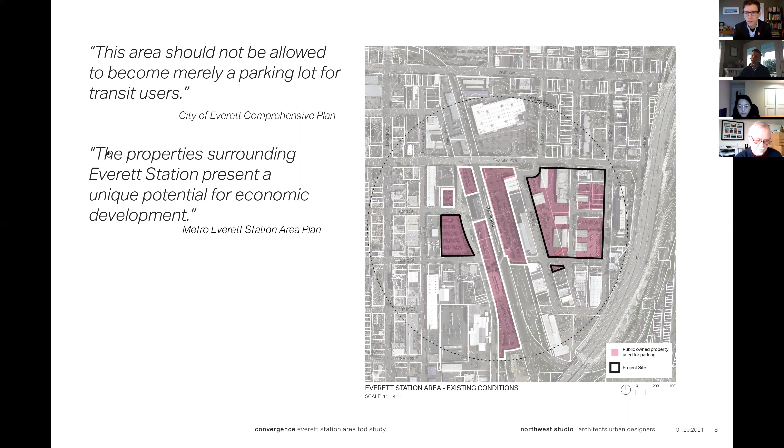Back in the fall, we were able to take a tour of the project site, just trying to get a clear understanding of the facts on the ground and what's physically there today and how that might be addressed. One of the questions that immediately came up as part of that work was where might Everett Station as a neighborhood fall on the spectrum of transit communities?

Clearly, it's next to the downtown core. It's a pulse point for transit and mobility choice as it links up to the bus and rail network. But it also has some very unique qualities, primarily the manufacturing and industrial character that's there today. So one of the questions is, does it even fall on the spectrum, or maybe we should be looking at breaking the mold or understanding the specific idiosyncrasies of this place?

Questions that fall out of that: how do we make the right impact in that context? How do we support some of those manufacturing and industrial businesses that are there today, and at the same time enable mixed use, mixed income development over the near term? And how might those two functions coexist and evolve together?

Also looking at how we might encourage the business sector to even grow in this neighborhood. Maybe there's an opportunity for a mid-range, Metro Everett scale job center coincident with the downtown. And then, over the long term, how does this area grow into a diverse, resilient, and equitable community? All key questions that this project is grappling with.

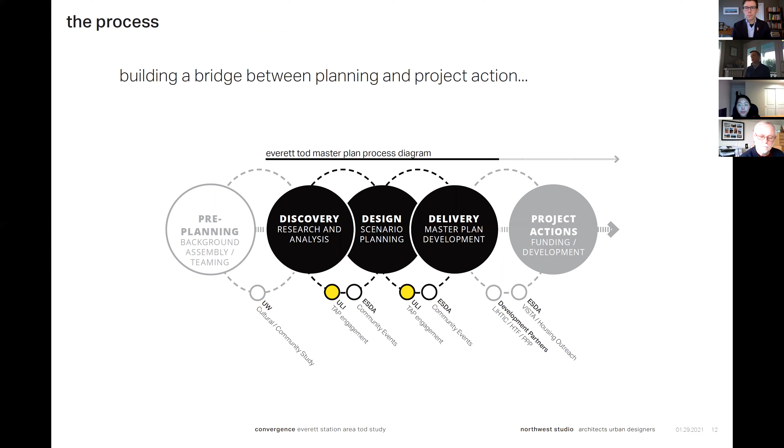We started in the fall with the discovery period. We're working now through design and scenario planning, working towards a master plan concept.

We've been asking a series of questions internally and through focus groups and outreach sessions to understand the range of potentials on any one of these sites. Today we're going to look at those ranges and gather feedback on what seems to crystallize, so we can conclude the project with an overall vision backed by information and feedback, with a clear path forward.

So Brock, I'll stop talking there and turn it back over to you for the next question. First, let's share the results from the first question.

Of course, this is just less than half of those who have responded. I'm now going to launch our second question, our first main question. One second here. If we could get more people to respond, that'd be great.

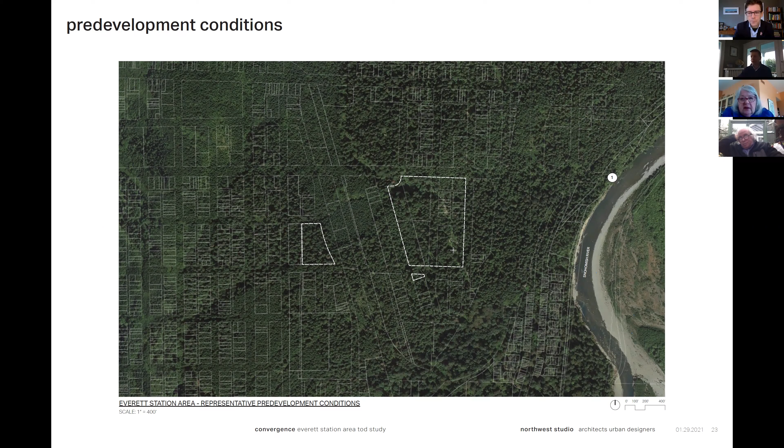Having a framework or notion of the potential responses that might come out of that understanding is important. What if we could return some of this area to pre-development conditions in terms of its environmental performance? We're not talking about erasing the development on these sites, but just the performance characteristics. It's something to think about as we move forward.

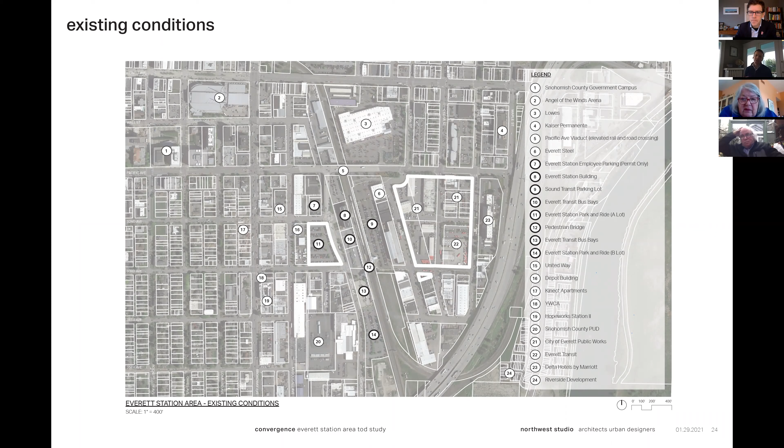Today the station area is populated by a variety of critical uses and functions. The station itself is at the heart of the district. The station building provides tens of thousands of square feet of community and public space for organizations and meeting areas. The park and ride lots and bus transfer stations create this mobility network and hub that feeds into other parts of the city of Everett and the region.

When we started this process, we began from the framework of the Metro Everett Plan, which establishes policy directives and zoning frameworks, not just related to land use. The area is now zoned urban mixed, which allows and encourages a variety of uses, together with the urban light industrial zone, which emphasizes industrial functions but also allows things like housing to occur.

Recognizing also that some of the frameworks under the existing Metro Everett Plan allow zoning heights somewhere between 7 and 11 stories, which can enable the typical 5-over-2 multifamily buildings you might see in an urban mixed-use neighborhood, all the way up to 11-story high-rises, which could potentially be an alternative model for development here.

The Everett Station area also includes, as I mentioned, quite a bit of public land. In fact, the majority of land area around the station is owned either by the city of Everett, Everett Transit, BNSF, or Sound Transit, which creates an incredible opportunity to leverage the value of that land for civic purpose.

There are also a series of potential street designations outlined in the development code, looking ahead to how a neighborhood might develop in the context of a transit-oriented district. One thing you'll notice is that the street typology and grid is fairly well defined as you move west toward downtown, but deteriorates as it moves into the district, recognizing that many of the streets there today are focused on freight and industrial manufacturing mobility.

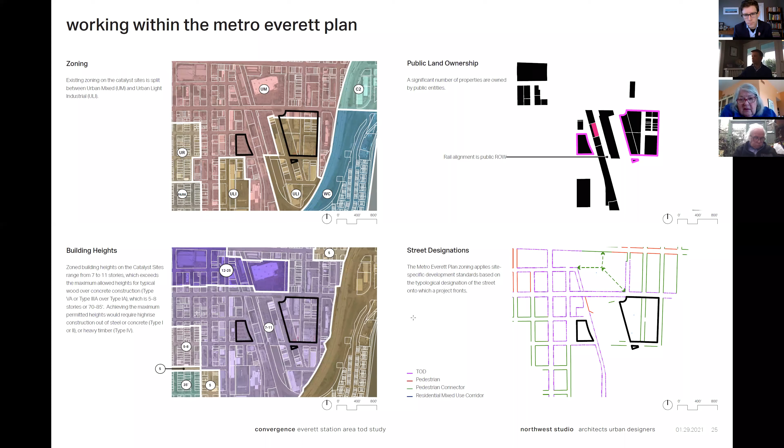So what are some of the programs we're thinking of as potential for these sites? Clearly, given the character and direction of the district, jobs and business spaces are a key piece of that. When we look at Housing Hope and HopeWorks as an organization, one possibility here is an anchor headquarters development for that organization, potentially upwards of 30,000 square feet, which could be a significant catalyst for development in the area.

We also look to key functions like childcare and other support programs that help businesses thrive. Folks in the industrial manufacturing workforce, or any workforce for that matter, myself as an architect, benefit from high quality childcare and education programs. To the extent that that can be part of a mixed use neighborhood is really important.

Public space, of course, community facilities, things like commute facilities and bike hubs and other access to key mobility functions are critical for the neighborhood, as well as mixed income housing. There are not many residents that live there today. There will be hundreds of millions of dollars invested literally in the future transit station, and to be able to provide more folks with access to that level of investment will be important to think about going forward.

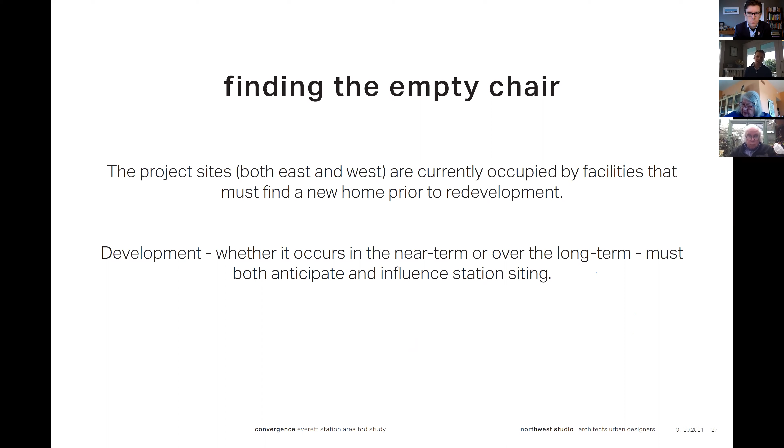As we think about how development happens on these two particular sites, while we're not locating the station as part of this project, understanding the potential for where that station could occur is important. I want to walk through a couple of the parameters that will have to be addressed as we talk about development examples and scenarios.

The first is the public works facility that is on the east side of the tracks. That function is currently looking at two potential options for relocation. One is at the Everett Point Industrial Center, or EPIC, which is just up on the Snohomish River. It's a very large industrial zone site that is probably better situated for Public Works' current function than the current site as it exists today. So they're looking at that as a potential move point.

As a secondary alternative, they're also looking to move down to sites on Smith Avenue, and the time frame for that move is somewhere probably within 10 years. I know they're working on a study right now coming to council probably at the end of the first quarter of this year to make a determination about which direction they're headed. But just as we think about development, we're probably 10 years out on that site, at least in terms of timing.

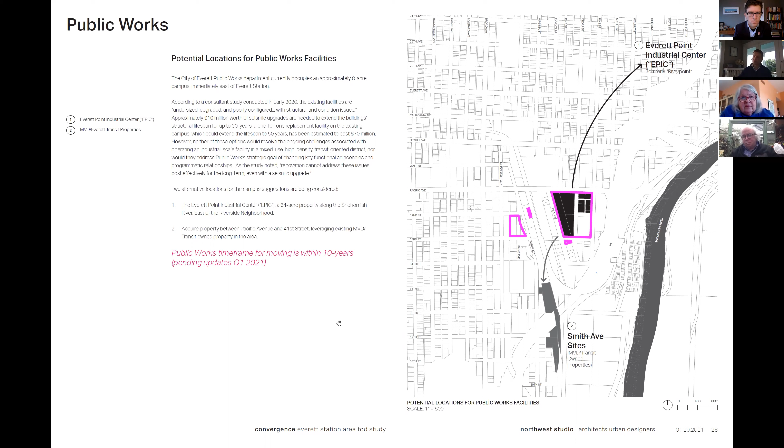Everett Transit, as you know, occupies the southeast corner of those eastern sites, on a property where it has its current bus facilities as well as bus storage and parking. As they look to potential moves, they've acquired land on Smith Avenue that might be a suitable location for them if they were to vacate that eastern site.

Their move, of course, is dependent on Everett Public Works, so they're just behind that in terms of timing - so 10 to 15 years potentially.

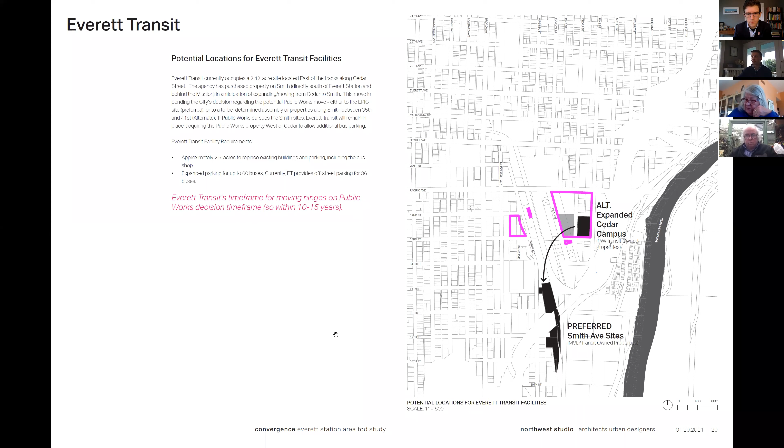And then, of course, park and ride parking. If we look at the west site, it's currently occupied by 242 stalls of Everett Transit's park and ride parking, 144 of which are committed to Sound Transit for the station. So in any redevelopment scenario, that parking either needs to be incorporated into a future project - that's the number 4 you're seeing on the screen - or it needs to find another home.

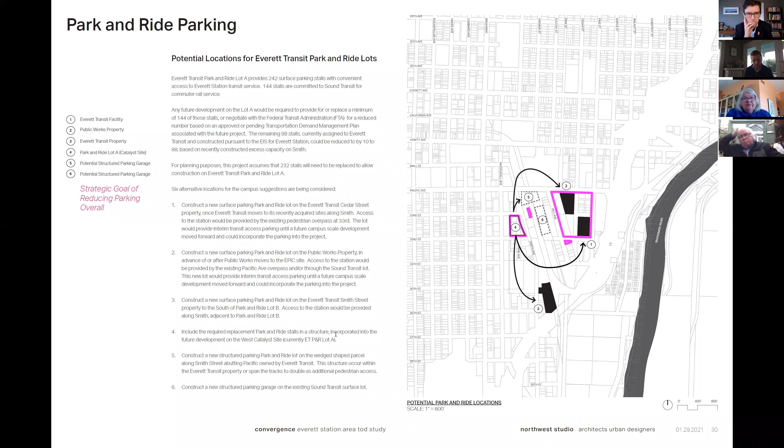There are a variety of locations for that, either on the eastern sites as an interim use as those sites, as Everett Public Works and Everett Transit kind of move about, or potentially on other sites close into the station. Either Sound Transit's property could be incorporated into that as redeveloped as part of the station development - that's the number 6 you see there - or it could be located down on Smith Avenue on the Everett Transit property, depending on where Everett Transit goes. So quite a number of moving parts that won't be solved by the time this plan is complete, but something this plan will need to anticipate as we move ahead.

And then, of course, anticipating the station - where might that go? Currently there are two potential scenarios. Again, the station is 15 years or so out, but the city of Everett has been very proactive in organizing a potential location for the station that really provides a link between the downtown core and the existing Everett Station itself, that would locate somewhere between 32nd and Wall, kind of straddling Pacific.

That would create that kind of hinge point - that's what you're seeing there with the number 1s. Sound Transit's representative alignment currently has the station in an elevated condition just south of the existing station building. That's what Sound Transit is moving ahead with in its initial planning phases.

But there are potential alternatives to that. Perhaps it could go on the east side of the tracks. There might be other locations that will become clear as we move further into that really 10-year planning process, as Sound Transit moves into its EIS.

So the time frame for the station is 15 years out. We're really talking about very expansive time frames as we look at this planning project. To Ed's point, it could be 50 years that it really takes to realize many of the changes we are contemplating as part of this plan.

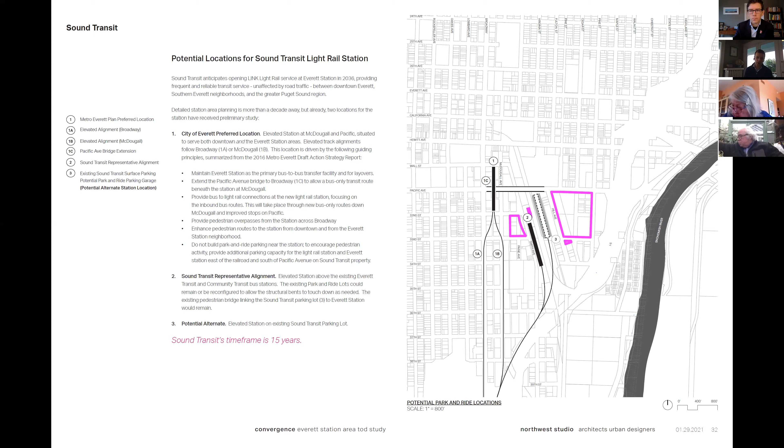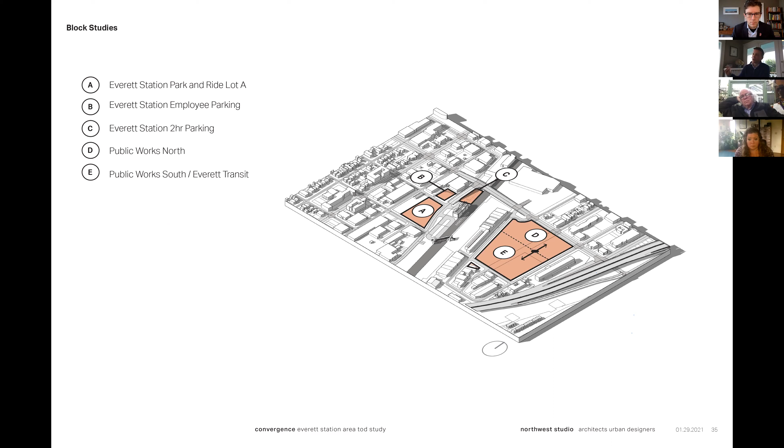A couple key ideas we're thinking about as we look to the potential for this neighborhood: how might we think about planning for the next generation? Clearly a future workforce here would need support services and programs, and one key piece to any work environment is affordable, high quality, reliable childcare for children. In an urban environment that's wonderful but also presents unique challenges in terms of play space and outdoor space for the students.

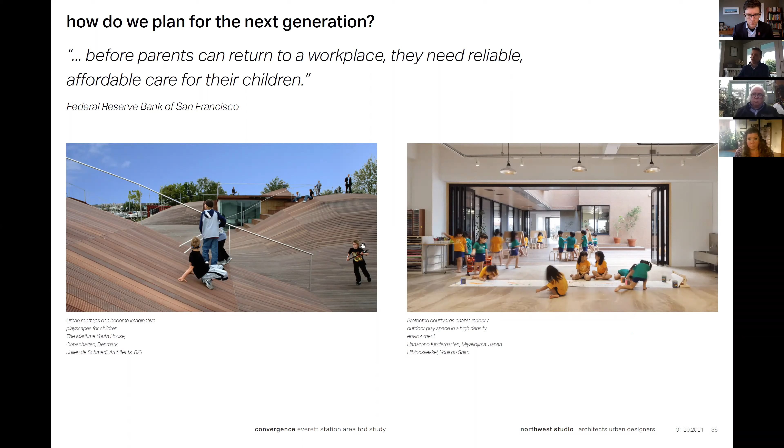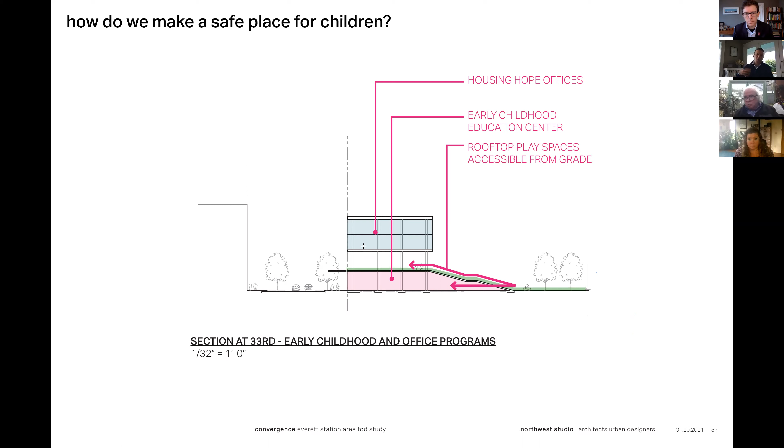As we look at the potential for that type of program to occur, particularly on the west side, given that Housing Hope has the Tomorrow's Hope early childhood education program that could become part of an initial development, we're looking at ways to allow those outdoor functions to occur throughout and within the building, potentially even on the rooftops.

Looking at how allowing childcare to occur in the neighborhood might play out on the Western Block, we looked at three varieties of how that might function. One might be a consolidated childcare building on the southern end of the block, co-located with HopeWorks and Housing Hope's headquarters building, creating an anchor on the southern edge of that block to help buffer between industrial functions south of 33rd and the more mixed use character of the neighborhood as we move north.

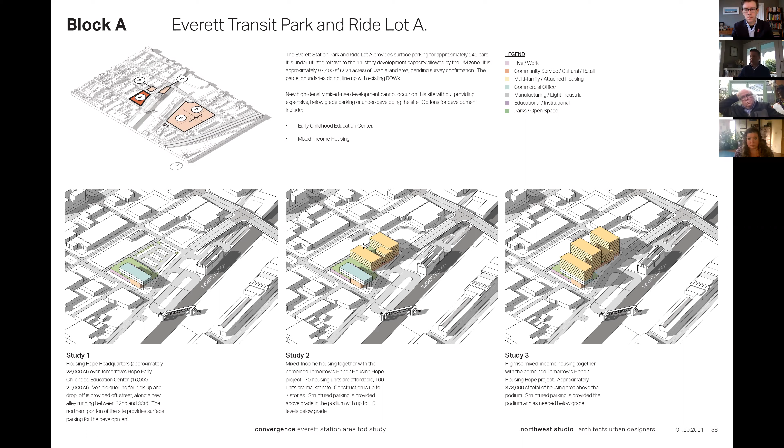We also looked at different levels of mixed use and mixed income housing on that western block, up to about 170 units of mixed income housing with a 5-story over 2-story development prototype, all the way up to potentially almost 400,000 square feet of housing, which is possible under the existing zoning code, together with other functions like early childhood education and office.

We also looked at other key considerations, like how do we leverage the value of the public realm? It's not just that we have an incredible amount of acreage in public ownership used for parking, but also quite a number of streets and rights of way that we might think about leveraging to catalyze development. There are examples of that sort of thing all over the country.

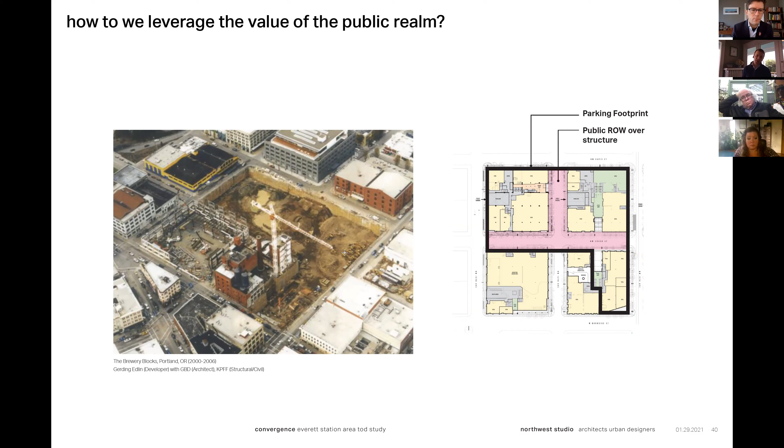We picked one nearby in Portland, the Pearl District, which started to redevelop from a former light industrial condition prior to the 1990s. One thing the city did was allow development underneath the streets themselves to help provide the parking that would be required in an underground condition, so that development above ground could build out to its fullest potential and really leverage the value of those rights of way.

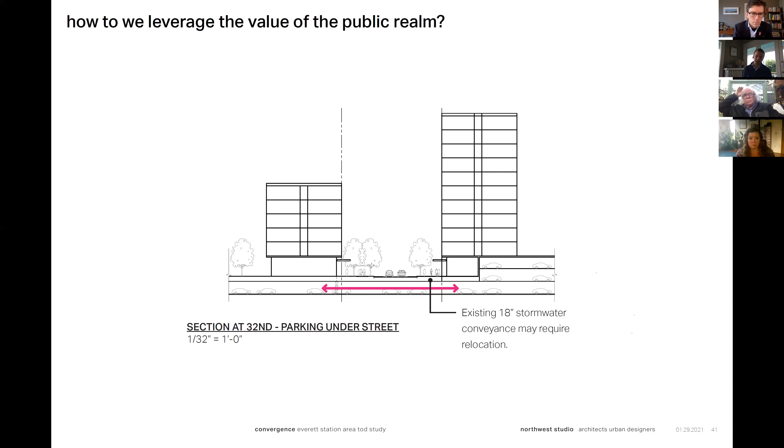One thing we might think about with some of the more constrained sites, like block B, just to the north of the park and ride lot we just looked at, is that to really leverage the potential of that site we may need strategies like enabling construction underneath the public right-of-way. Because as that block exists today, it really can't hold the mixed-use development capacity to which it's zoned.

So if we don't look at some alternative to unlock the potential of that block, we're really looking at primarily a small format, potentially community program development. But if we were able to build underneath that street to provide parking, then we could unlock some of the zone capacity there, which could be used on its own or paired with development to the south.

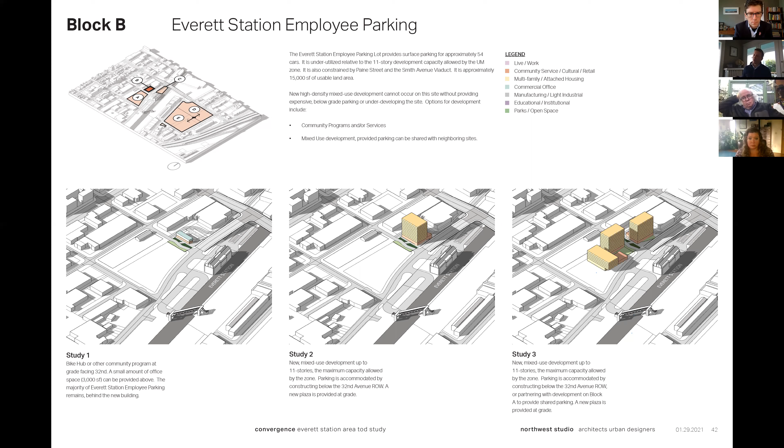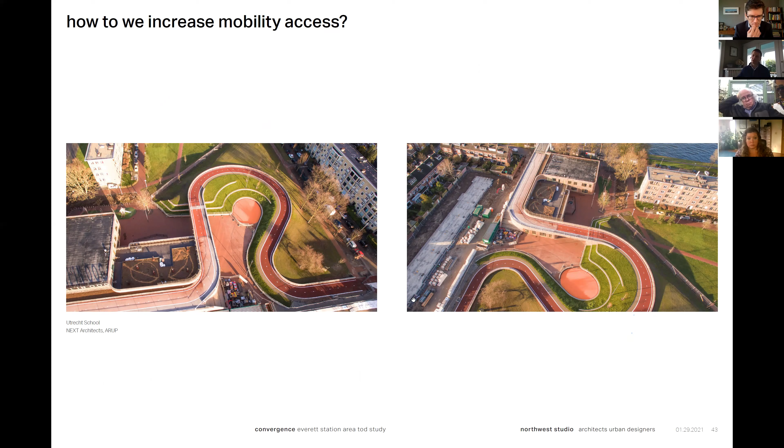We also looked at key ideas like how do we increase mobility access, and increase access to the station, really bridging the divide that the tracks create between the east and west blocks. It could be that we just need to leverage some of the infrastructure that's already there - the Pacific Avenue Bridge is a great example, providing a key point of connection for vehicle and freight traffic over the tracks.

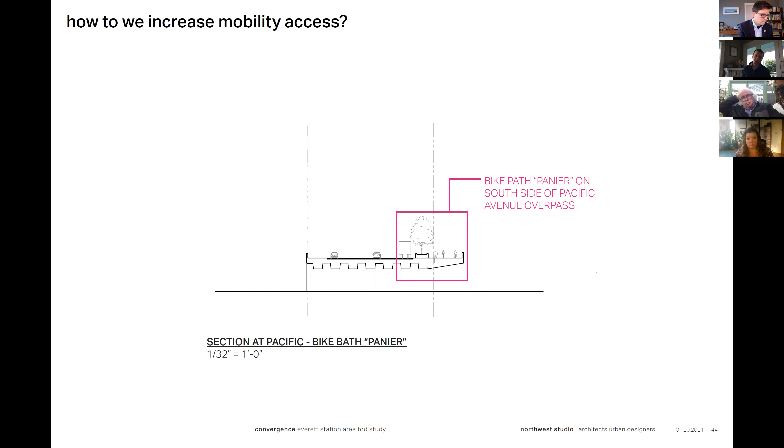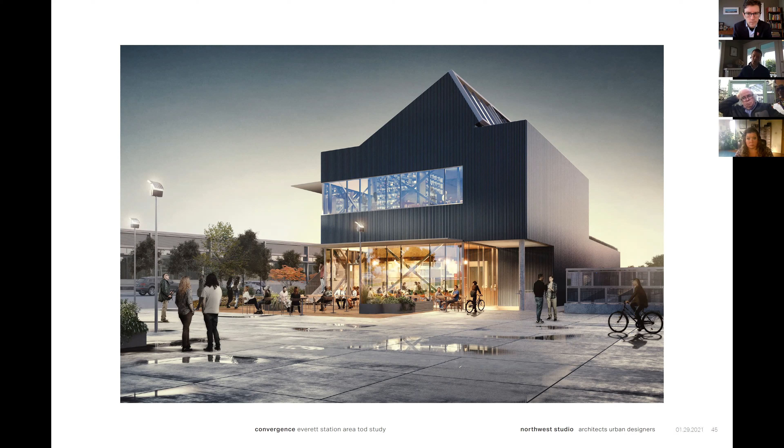But to the extent we can, maybe we can extend that right of way just a bit to allow for multimodal connections across that portion of the neighborhood - potentially building a bike saddlebag or path on the southern side of that block, or developing things in concert with the wedge-shaped property just north of Everett Station, in the nook just south of Pacific Avenue, that provide commuter facilities and bike facilities for folks moving in and out of the station.

As we looked at that block, there could be a variety of options to provide that secondary or tertiary level of connections from east side to west side. Everything from locating a bike hub building, to simply building a bike pannier on the side of the bridge, to even using that property as a parking garage site to help provide some of the needed replacement parking for those 242 stalls, and use that to leverage connections across the tracks, which, to Miranda's point, could tie into Sound Transit's own planning for its property and for the station.

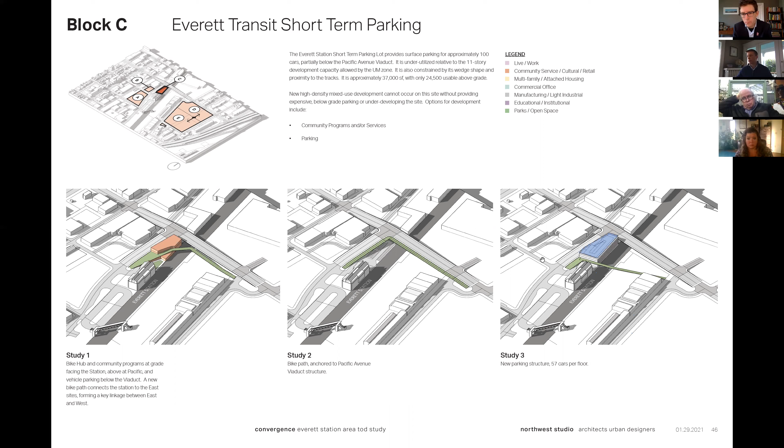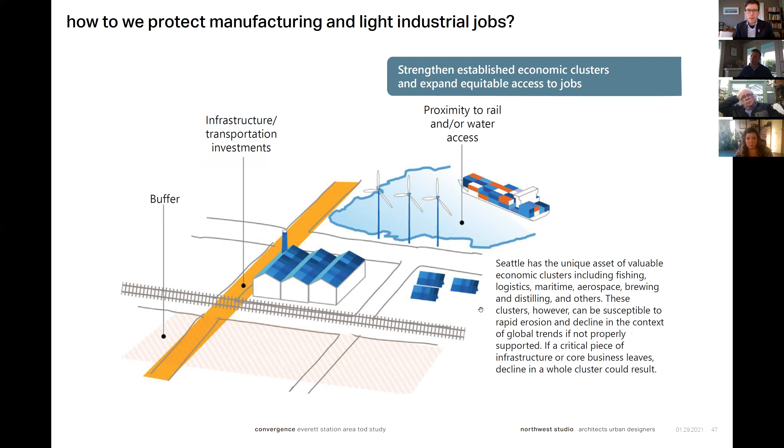We're also looking at how to protect manufacturing and industrial jobs, key strategies like buffers between dissimilar land uses, particularly residential, and a few other pieces to help support that condition. As we look to development in the neighborhood, there might be parts of blocks held out so that we can provide that separation between mixed use and industrial use, which really helps protect the viability of some of those businesses that have more noise and vibrations associated with them that new residents don't always play well with.

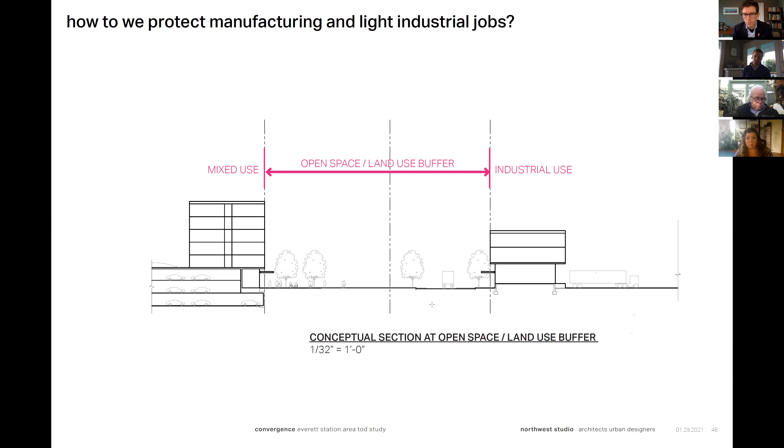And those buffers can really become key points of open space or parks and other civic infrastructure. That's really critical on the east side of the site, where we have a fairly large block, that division between blocks D and E, where we might think about leveraging the potential of that zone on the north, but really looking at the needs for industrial landowners to the south and providing that buffer between them.

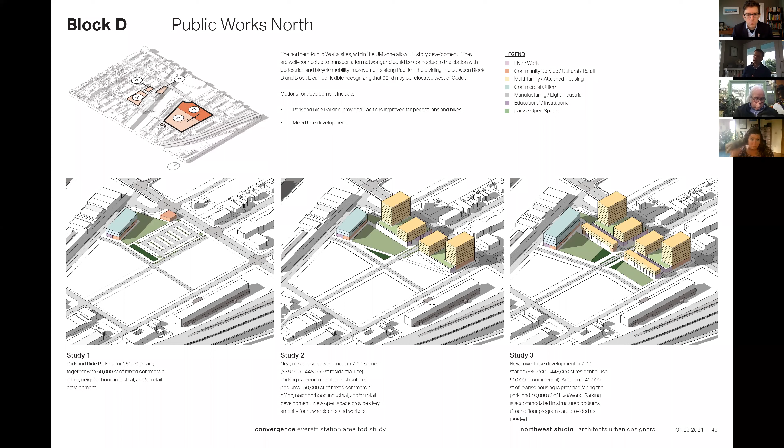Another concept we're working with is how do we enable business to continue and thrive in the district. One of the great things about light industrial manufacturing and neighborhood industry is the activity that can occur in some of those spaces, and that activity can be leveraged to really enliven the street and sidewalk space.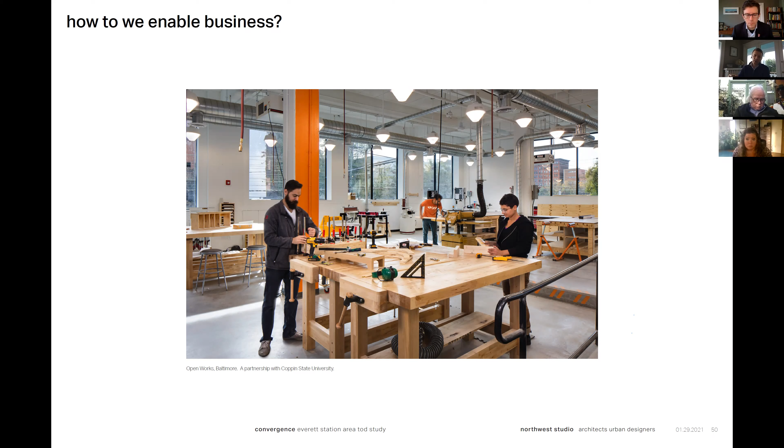Examples like Open Works in Baltimore have really taken advantage of that potential to transform a neighborhood. As we look at what might occur or strategies we might deploy here, currently the code prohibits manufacturing industrial use on the ground floor of redeveloped properties, and we may think about rethinking that idea, because it could really be a key piece of moving the neighborhood forward.

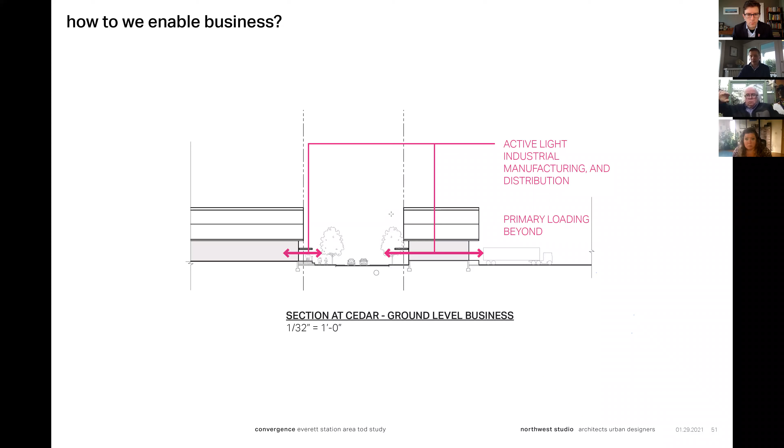As we look at how that potential might play out on the southern portion of that eastern block, clearly there are so many opportunities with a land area of that size and the mix of uses currently allowed under the zone. Everything from light industrial single-story development currently permitted, to a campus-level job center, the equivalent of the Spring District in Bellevue, or portions of South Lake Union in Seattle. There are really millions of square feet of development potential over there.

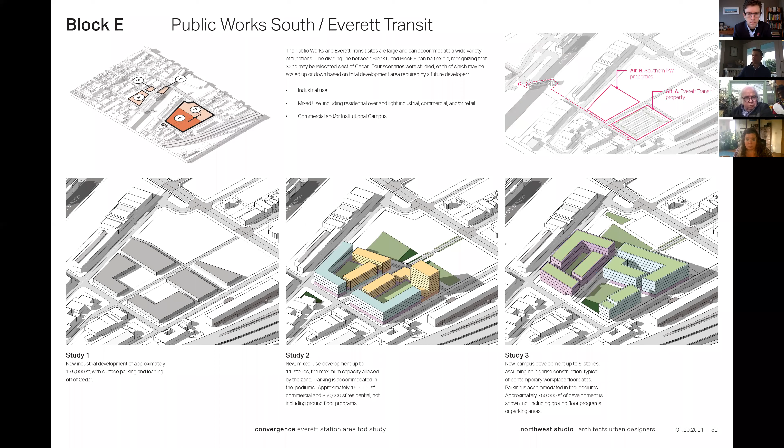So how might that roll up into an overall strategy for neighborhood development? It could be that from a land use perspective, there are a spectrum of land uses deployed across the district, focusing some of the more commercial and industrial uses further to the south, really bordering on 33rd, to create that important transition from commercial industrial use through to a more mixed use condition as we move northward into the district, and then provide those key connections to downtown Everett and beyond.

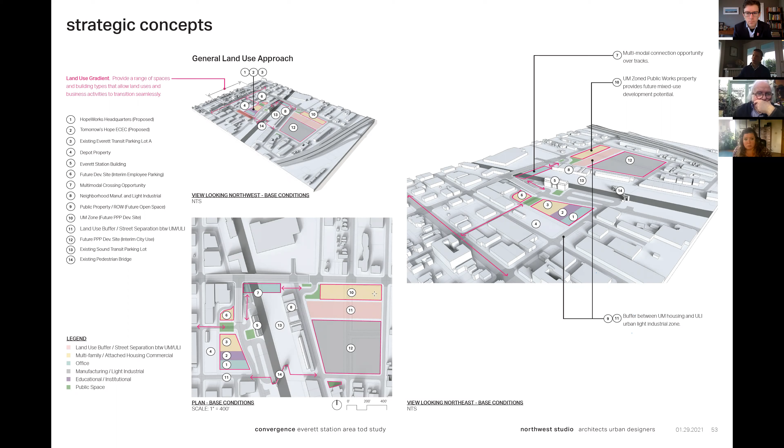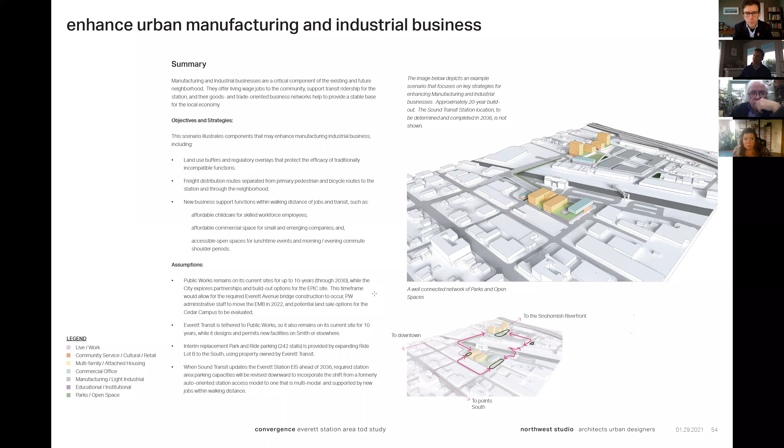Just as an illustration of the assembly of those different strategies into an approach, this is by no means the approach, but just three different ways to think about the site: first, enhancing the manufacturing industrial business by holding out the land on the southern portion of that public works lot for future planning and those uses, to thinking about neighborhood development as anchoring a job center in the district.

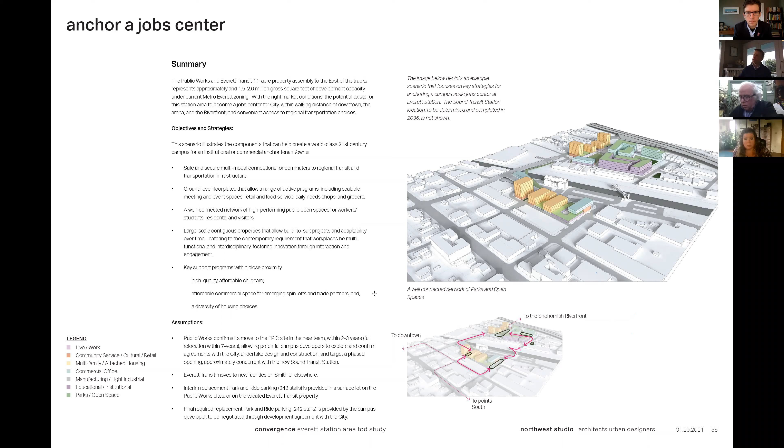How might that occur, and what might some of the land use and building form needs be to enable that? To really creating a fully mixed use and integrated district that allows housing throughout and provides some of those key early functions and support services, particularly on the west site, with a headquarters building for Housing Hope and HopeWorks, together with Tomorrow's Hope Early Childhood Education, and really much needed affordable housing and market rate housing on those blocks.

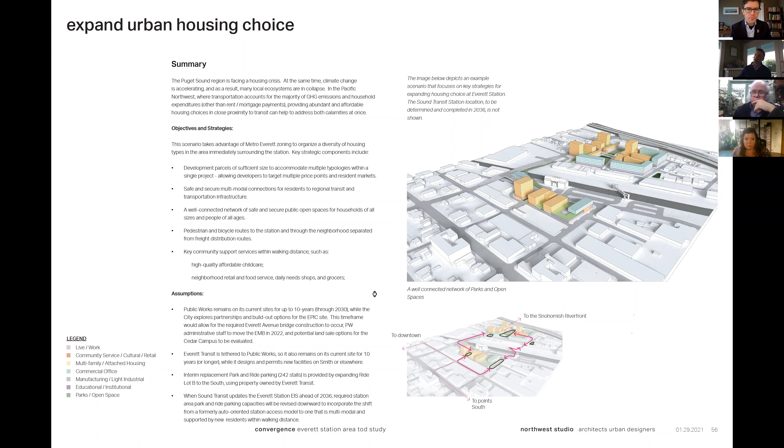So that was a lot, and it was quick, but I wanted to get the basic parameters out there and thinking out there. Later on, after we ask this question, we're going to move into some of the consultants' work on the particular issues related to infrastructure, mobility, and finance.

So Brock, we have just one question this time, after seeing a bit of the presentation in terms of what we're looking forward to: what are the most important issues to address now? There may be things not listed here that you think should be important, so feel free to add them into the chat. Unfortunately we don't have a feature within the polls where you can add something directly into the poll so it gets accumulated, so we do have to use the chat feature.

It worked this time. Thank you.

David asked, on the assumption that what you're showing us now is a preview of what's going to be in the report, should we look more at these slides? Yes, that's right. What we're doing here is...

providing a variety of different approaches that we'll need to refine in the report. We don't like to use 'preferred alternative' because it seems like you just pick from a menu, and that's not really what planning is. Planning is about finding a set of strategies that works for everybody, and those strategies might be divergent and overlap. But yes, you can take a look at all of these pieces. We'll post the presentation, and the final report will include a preferred direction—a synthesis of all these strategies, not any one of them in particular.

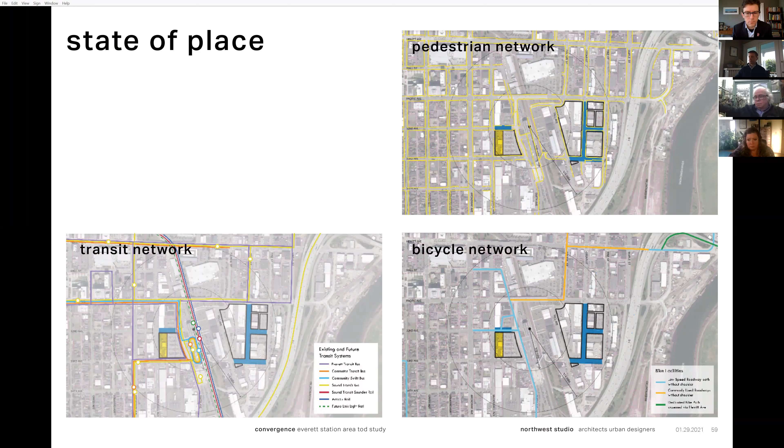Next slide, David. Next slide. There you go. So at the beginning of this process, before that one. Oh, sorry, my refresh rate is quicker than yours.

There we go. So at the beginning of this process, we went on a walking tour of the site, and some of our key initial impressions center on walking conditions, connectivity, transit connections, and parking. I think these are going to resonate with you if you know this area. The most prominent finding, in my opinion, was how unwelcoming some of the streets and connections can be.

Whether you're walking on some of the higher speed and volume thoroughfares like Broadway and Pacific, or walking along some of the district's industrial streets, you just get the sense that this space is for vehicles mostly, and not for people.

The rail corridor barrier, as David mentioned before, is a real limitation of the site. It creates 2 true halves, and it makes walking and biking fairly inconvenient between the 2 parts of the site.

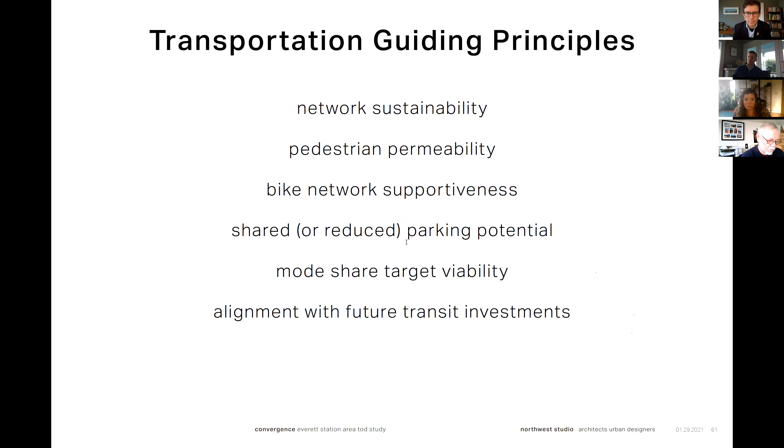Now moving into the strategic direction. Our strategic direction centers around 4 main questions. The questions we're trying to answer are related to how development can support a pedestrian-first district that is also transit oriented and reduces the need for parking.

How might development opportunities best connect people to both the current multimodal transit center and downtown Everett?

How transportation demand management strategies and effective parking management strategies can actually help catalyze development. And then finally, how we actually balance development of a pedestrian first and transit oriented community with ongoing industrial uses.

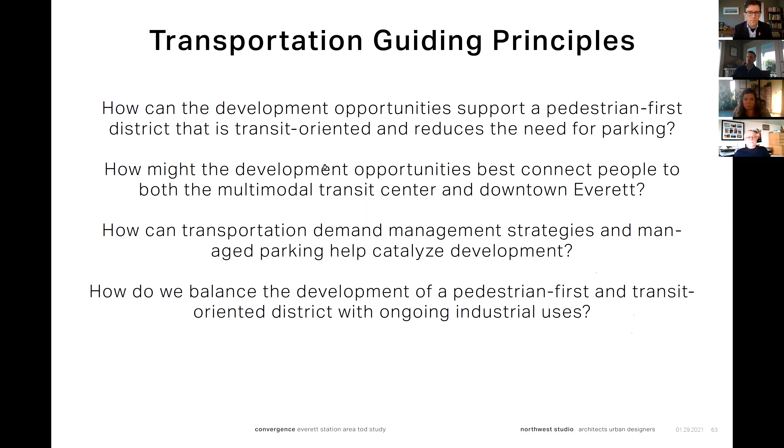We've identified 4 strategic directions with some potential actions. A lot of work needs to go into this, but these are just some initial opportunities we've identified. First is to manage demand for vehicle trips, off-street parking, and curb access.

As I mentioned, there's that 45% non-single occupant vehicle mode split target that the city is trying to meet by 2035. One of our most prominent findings is that parking is oversupplied, it is undermanaged, and it's really almost guaranteeing that people will continue to drive to and from the project area.

Parking and transportation demand management policy and programming is one of the most effective tools we have here. We're hoping that the city and the site stakeholders can align on development of these demand management strategies, including a parking management strategy that optimizes existing off-street supply and the curb network.

We believe that the current parking supply, as well as the potential future land use development, can actually support a district shared parking model, which aims to address peak parking on an hourly basis. You look at parking demand district wide rather than looking at parking as a whole for each land use. So there's a lot of potential there.

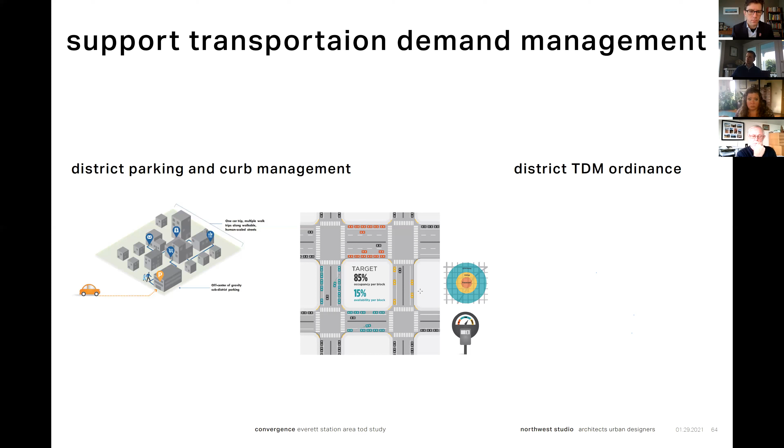The second direction is related to street investments. First and foremost, there are going to be various demands on district streets related to mobility.

loading, parking, but also more of an emphasis on public space, potential new park spaces within the public right of way. This is really going to require a thoughtful look at how you prioritize space throughout the district and along every single street. This is going to be really critical as there is interest to make the limited network you have do much more for more people that are going to be there in the future.

There's a strong interest to maintain industrial land uses, which is going to require accommodations for freight and delivery within a more walkable transit-oriented district.

We need to ensure that streets are both human scale but also facilitate the movement of transit and freight. We also think there needs to be a coordinated effort to align new enhanced pedestrian crossings with pedestrian and bicycle desire lines. One benefit of a site with limited street connections but large parcels is that we can create cut-through opportunities, so a coordinated approach is really in order.

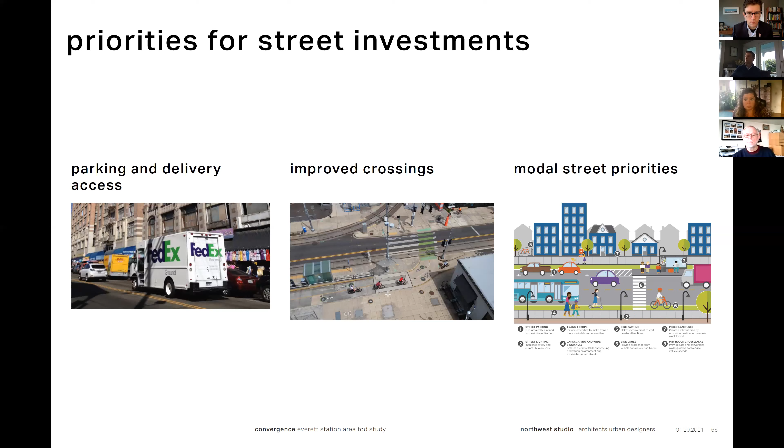The third direction is related to active mobility. I saw a lot of comments in the chat box about the real need for better pedestrian and bicycle facilities. The first opportunity is what we're calling creating the loop. The east-west division in the site creates a real problem for connections across the district, so we think a branded loop facility for people walking, biking, rolling, scooting, or what have you is really in order. Some of those concepts were on slides David showed earlier.

We also think potentially pedestrian-only streets and shared streets are a great opportunity. We think 32nd Street is a prime candidate for a street closure, rededicated to public space, walking, and hanging out and eating food. There are also shared street opportunities that might connect into the future Link Light Rail Station, as well as many streets in the southeast corner of the site that are more industrial in nature. We think that's a possibility.

Finally, this area really needs higher quality bikeways, and the city should think about protected bike lane connections to and through the district. We think there are opportunities on Smith, Pine, Payne, and even Pacific. Next slide.

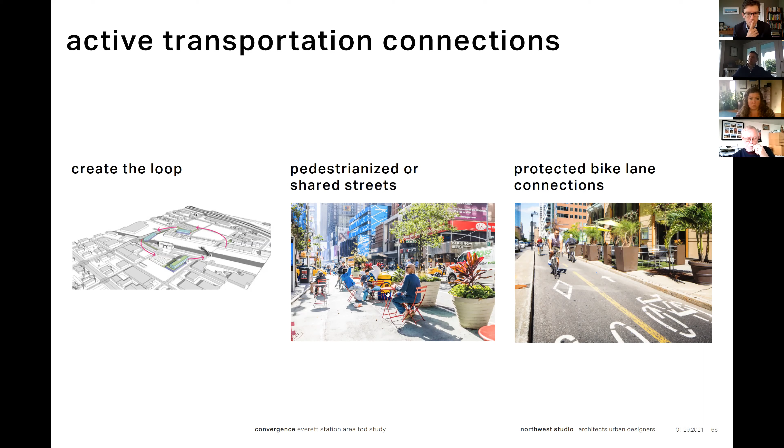The fourth and final direction is related to station access. This is a great opportunity to develop a true mobility hub. The Everett Station does operate as a mobility hub currently, but things are a little bit disconnected, and there's a need to co-locate more mobility options and amenities to meet the diversity of travel needs and preferences for people using the station, as well as the diversity of needs for people who will be living there 10 to 15 years down the line.

More opportunities for bike share, more opportunities for car share, dedicated locations for passenger loading. The hub area should also better locate and invest in end-of-trip facilities for people biking to and from the station — more short-term bike parking, long-term bike parking opportunities, more bike maintenance facilities, and the like. The hub can also benefit from a coordinated, multimodal wayfinding system that would increase site legibility and help people understand what transportation options are available to them at any point in the district.

That is it for now. There's a lot more opportunities than what we've presented here, but this is just a taste.

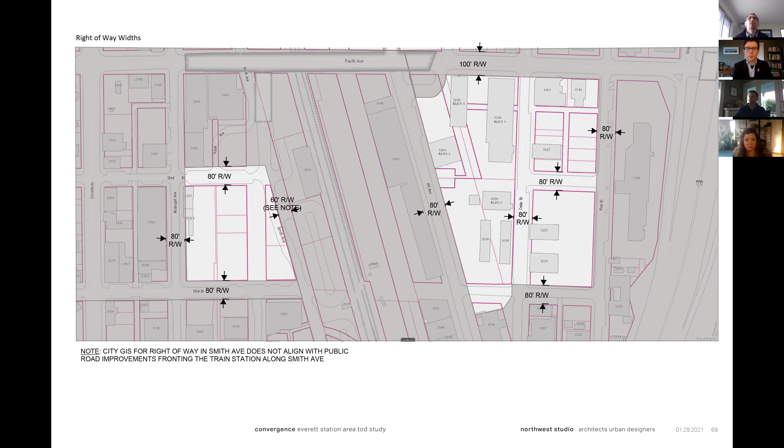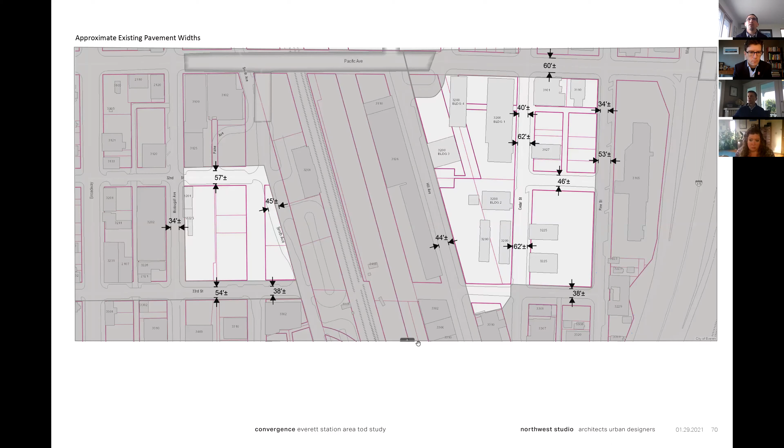This one shows, within that 80-foot right-of-way, the distance between curb to curb. Currently, as we heard, it's really dominated by space for vehicles, for both movement and parking. A lot of the streets, at least on the east side, have angled or pull-in parking, so where can we reuse some of that space to add more walkways and green stormwater infrastructure? Next slide.

What does this mean? It's based more on pipe capacity. Flow control may be required depending on how the system is downstream. One thing we don't want to do is add a lot more flow to this site and cause combined sewer overflows, so it's more concerned about detaining stormwater flows versus water quality. The water quality is really handled by the wastewater treatment plants.

But stepping back, what are the main goals for this redevelopment? Are we really trying to mimic those pre-existing forested conditions? So maybe we look beyond just code-related requirements and really try to infiltrate more water and reuse more water on site.

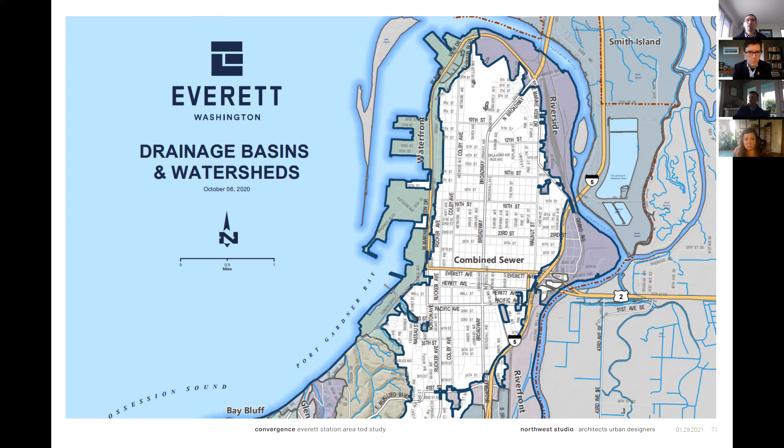I'll talk more on the public space, relatively briefly. When we look at public space in the district, one of the big takeaways is the lack of dedicated people space.

Other observers have made similar findings, and it's not just within the discrete bounds of the study area, but around the neighborhood. Where are those places where kids can go play, where people can recreate, have an outdoor picnic? So we start to look at what spaces within the district we can begin to carve out as public spaces.

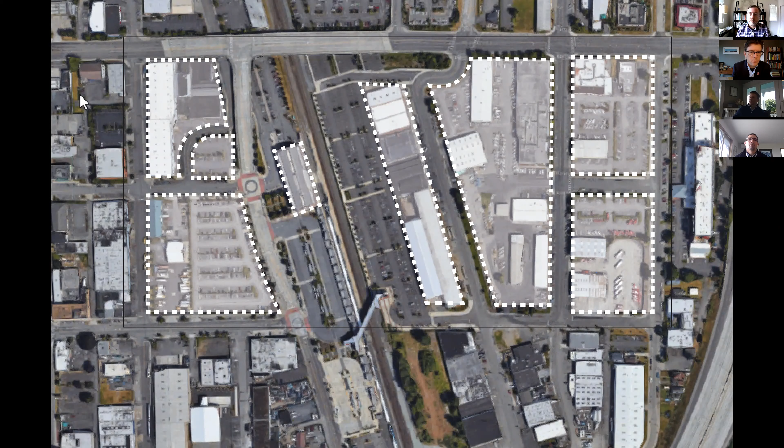This is the rest of the area available to us: those streets, those sidewalks, the spaces in between buildings, which ends up being about half of the total acreage, both within and surrounding the study area.

I think the key question we want to ask ourselves, as we're thinking about how we redeploy that inventory of horizontal space, is how do we frame it up so we're investing in that space in a way that advances equity principles, centers community, designs for all, cultivates safe and healthy environments, promotes environmental justice, and preserves and utilizes local assets. That's where we're going next—thinking about those opportunities.

Mark, I'll turn it back to you to talk about the framework here. There's already been discussion on street typologies. As we look at moving people, bicyclists, transit, and even freight mobility, we could come up with typologies for the different modes of transportation.

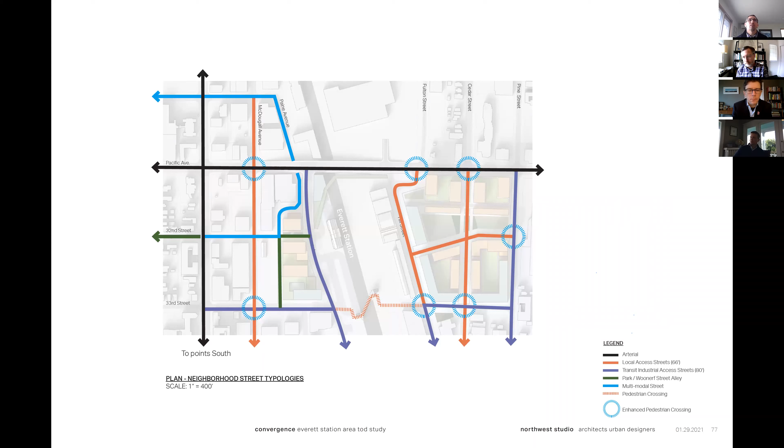We're looking at larger vehicle movements—industrial large trucks where you need to get them through the street, but also around corners. So accommodating those movements, you might have slightly wider streets, but still want to stay within 80 feet to provide access for pedestrians. This means reusing some of that pull-in parking for more parallel parking, taking advantage of that space.

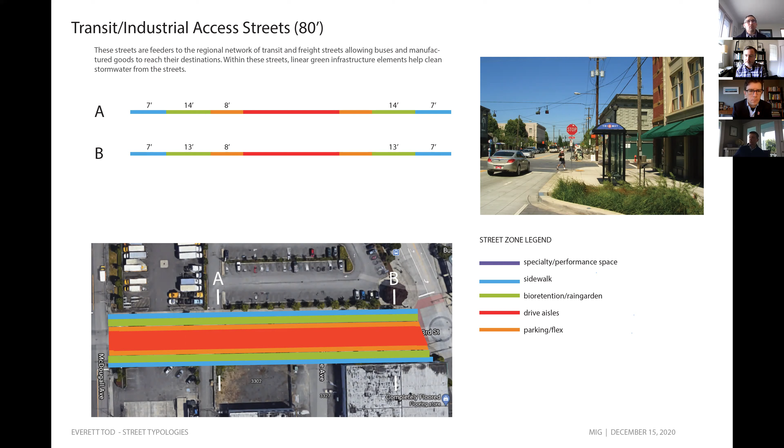For local streets, it's more about that calming effect—where you can sit out and have a calming walking area, as Evan mentioned. So it's narrowing down the streets, adding a bit more sidewalk, and enhancing areas for plantings. You can see photos in the right-hand corner of stormwater treatment facilities and infiltration along that.

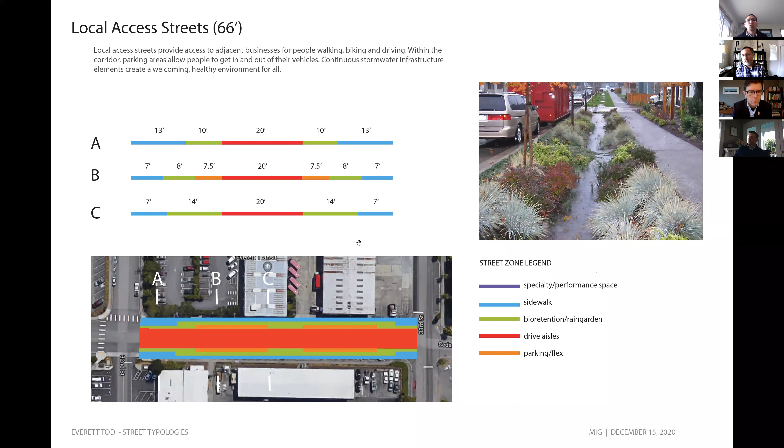Another thing we'll look at is multimodal typology—protected bike lanes, where we can incorporate and separate them, letting people cut through and connect to the transit facilities.

Here Bryce will talk more about taking advantage of that right-of-way and using it more as a gathering space. Several observers—Dave and Evan—have looked at the opportunity that 32nd provides in connecting Everett Station back up across Broadway, potentially to downtown, and how to strengthen that connection. It's sort of begging to be more of a people space, and there are two models we wanted to put on the table for the community to consider today.

One opportunity is using this street typology borrowed from the Netherlands called a Woonerf. The idea is that it's a people space where cars and vehicles are the invited guest. It's slow speed, often quite green, and filled with art, like you see in the upper right-hand image. It's a place people can feel like they can walk across at any spot without feeling like they'll get hit, while still accommodating vehicular mobility.

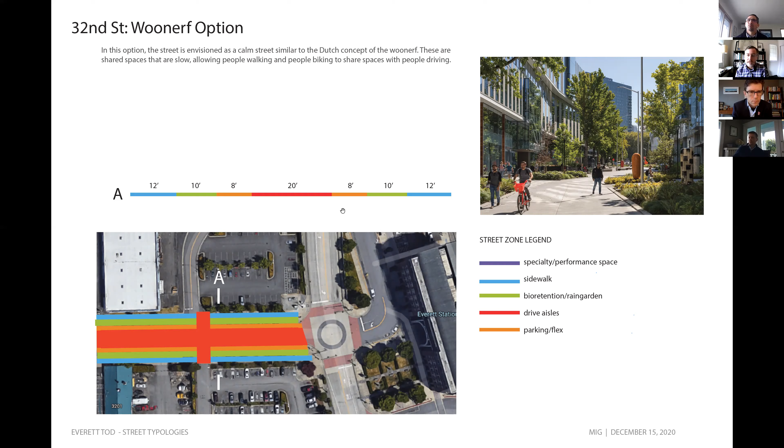The next option is perhaps a little more interventionist, imagining closing some or all of that street. Here we're showing it happening from the alleyway toward the station, closing it down to let it be a performance space, a plaza, or a water park where kids can play and adults can gather after work, maybe enjoying a concert. It's a space explicitly and always dedicated to people, creating that spot that's currently missing within the district.

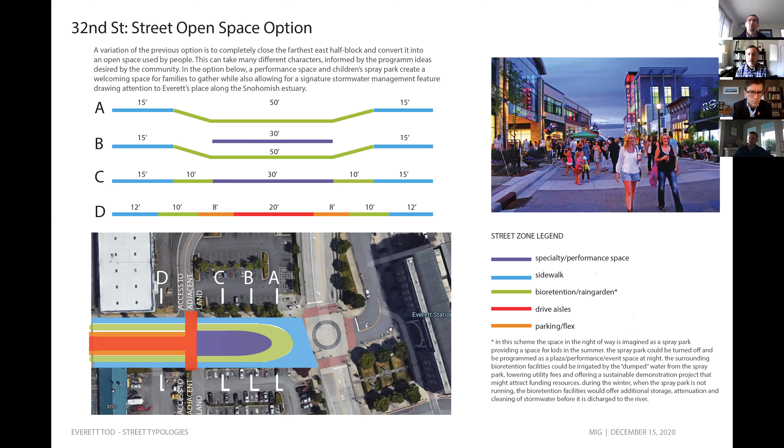I think that's our last slide here. So some examples of that are gathering spaces where people can gather after work.

Places where the street can be shut down and turned over for performance. This is Bell Street in Seattle.

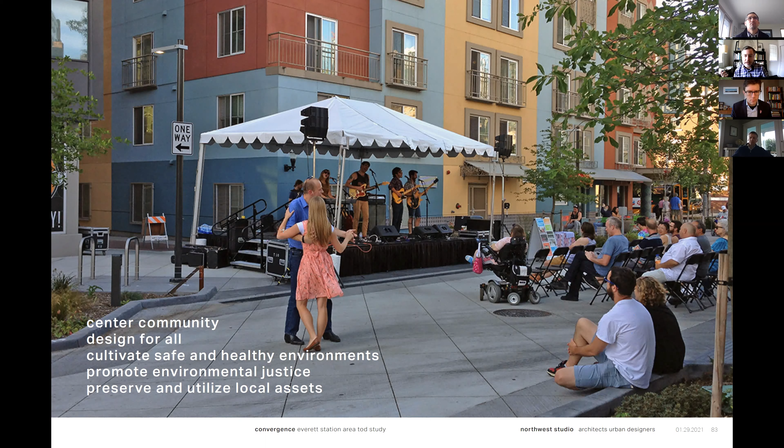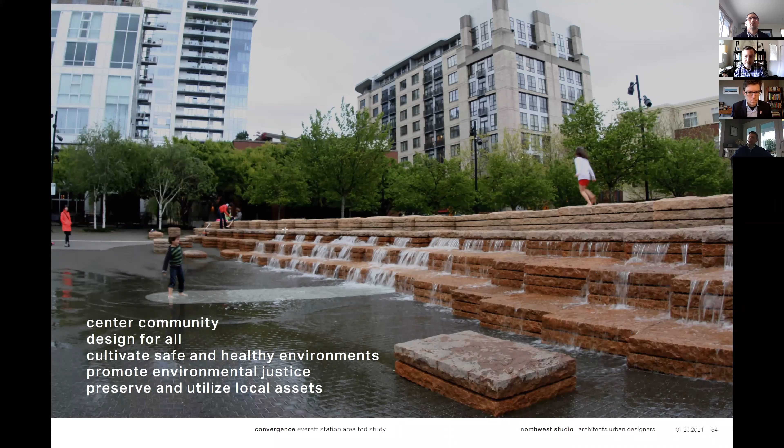Places where we can treat and hold on to stormwater, reducing our environmental load and improving it for people and for salmon.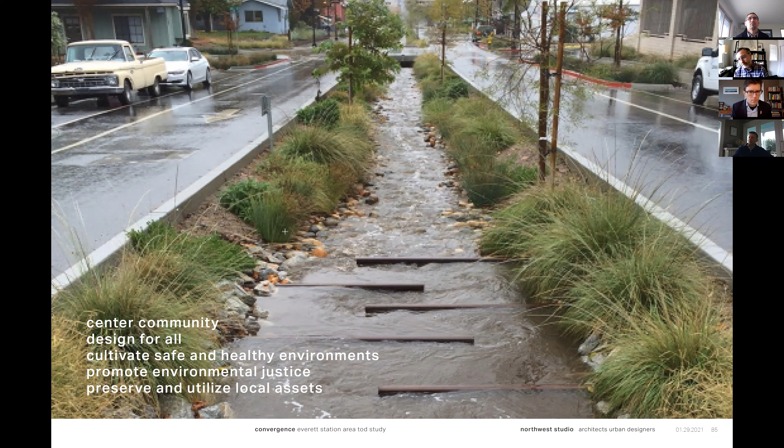And finally, places that reflect the living history of this place. That industrial heritage is something I don't think anyone wants to lose, and we need to talk about it and celebrate it. This is an example some colleagues of ours worked on down in LA, where it was very much a working landscape, and those industrial uses were still there, but that doesn't mean it can't also be a place for people. This is an exciting image for where we might want to take public spaces in the area.

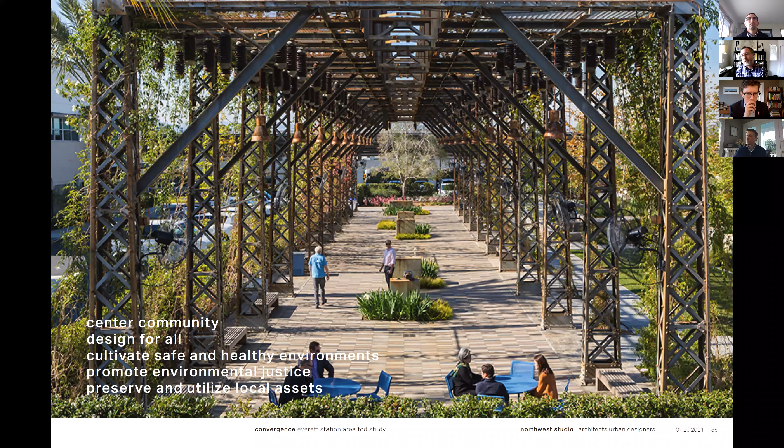I think that's it for us.

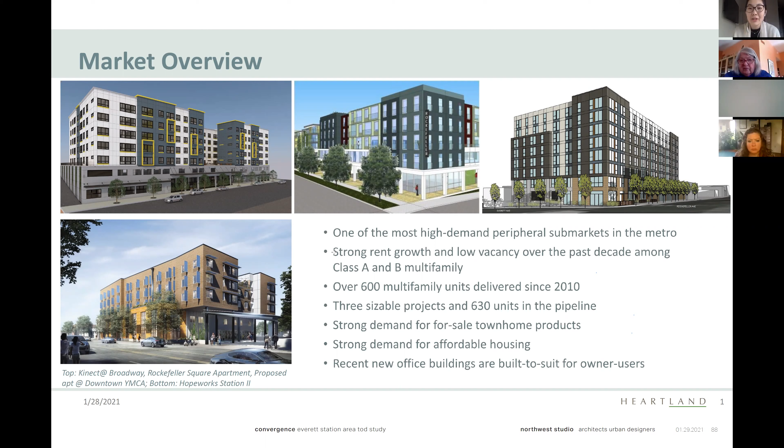Thanks, Dave. For the sake of time, I think we can skip this page. You could go to the next page. Hi Dave, did you get the next slide up there for you? Yes. Great, thank you. Well, so the team, a little bit louder—can you hear me?

Yes, okay great. So the team has set a great vision for the district. In this section, Chris and I will discuss potential project implementation strategy, what a public-private partnership structure might look like, and what the timeline looks like for the West Catalyst property especially.

So the City of Everett and Housing Hope have many assets to leverage to support the vision for the district. As you see on the map, these are properties owned by the city, and we have potential site control of private properties. Housing Hope has strong experience in affordable housing development, and we also have support to attract public funding for public realm improvements. Tomorrow's Hope's experience in early childhood education center operations will definitely help with the development program in the plan. Next slide, please.

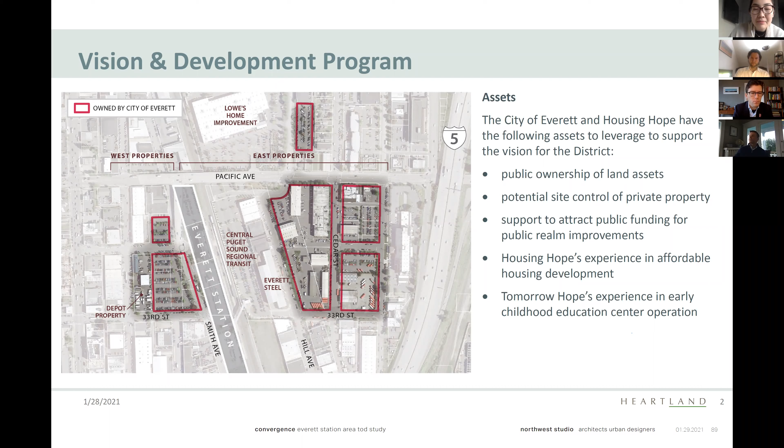Sorry, there's a lag on my end. So to focus on the west side for now, to realize this vision, there are several strategic steps the city and Housing Hope can take. First, Housing Hope and the city will create the vision, define public realm, and the development goals for the district. The project team will then need to plan and secure public investment for public realm and open space improvements.

Housing Hope will develop an integrated affordable housing project, potentially with the Early Childhood Education Center and Housing Hope's office headquarters as part of a building on its own, depending on the development timeline, but as a catalyst project for the West Catalyst site. Finally, we see the city can issue a public offering to solicit the right development partners for the mixed-use development for the balance of the property.

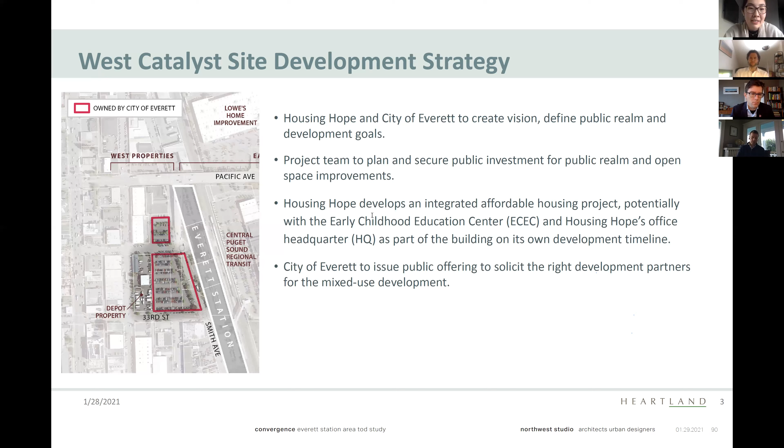We know the Early Childhood Education Center, as Dave mentioned, is an important component of this project, to house Housing Hope's growing early childcare program. Building a childcare center is not cheap. The turnkey development cost could be $650 per square foot. The development could be partially financed by a permanent loan underwritten by future rent revenue, but there will also be a large equity gap.

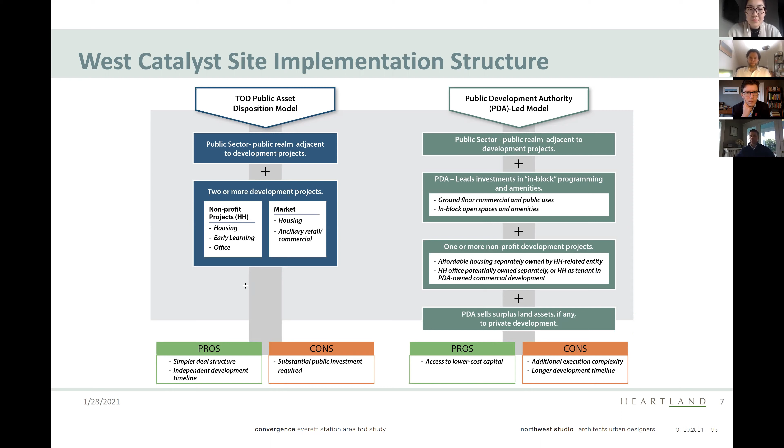And to our last slide here, this may be slightly aggressive, but why not set the hopes, try to strive for greatness and then see what happens, right? The other approach is under-promise and over-deliver, which is what the consultant teams are supposed to do. But let's put that aside for a moment.

One idea would be to use 2021, if what's coming out of this study is enticing to folks, to get into more project-level feasibility study and vision adoption. There's a political element that rests with the city of Everett, likely the best champion here, to figure out how to adopt that vision and promote it, and also begin to think about how to secure and coordinate infrastructure dollars, perhaps investigating a PDA structure that might be a better steward to do that and what that would entail.

And also beginning to negotiate with Sound Transit some of the parking agreements here, because without liberating this site from a substantial parking burden, nothing is going to happen here in the near or midterm, frankly.

And then from Housing Hope being kind of the lead proponent, flag bearer for this project, there's some elements of exploring and beginning the financial conversations around their early childhood education and office projects. Those are things they've looked into to some extent to date. And then of course, the affordable housing program is squarely in their strike zone.

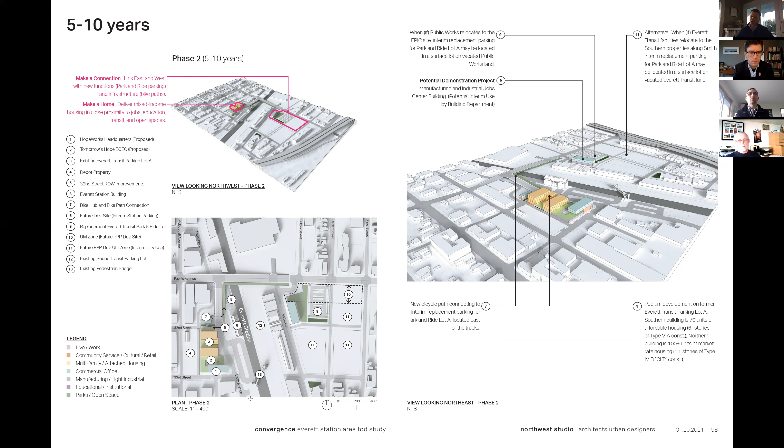Over the 5 to 10 years, it could be that if Everett Public Works moves to the Epic site, or moves off site, some of the properties up along Pacific could become available for disposition and development. The most likely scenario there is a mixed use condition, building in some of those buffers that could be public open spaces to the south, letting the southern portion of the property play out in a variety of ways, one of which could simply be reinforcing the neighborhood industrial and manufacturing character of the district by enabling projects like that to go in.

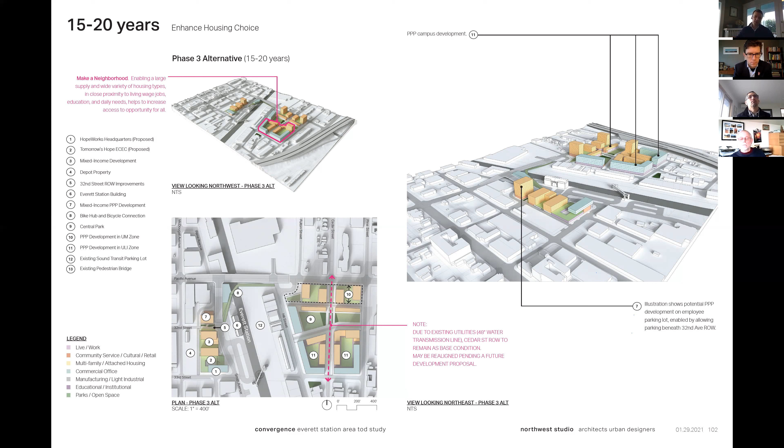It could also be that something more ambitious and all-encompassing is possible, a campus scale development attracted to that area given the size and scale of the potential development footprint. Or it could be that things develop over time, over 15, 20, or maybe even 30 or 35 years, so the neighborhood becomes a more mixed use and integrated land use district in conjunction with downtown. And that's what we have today.

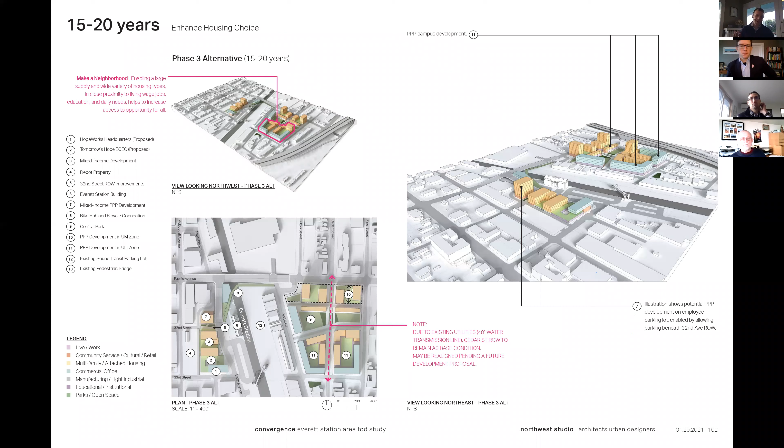I'm going to go to the last question and turn it back to Brock, and we can wrap up.